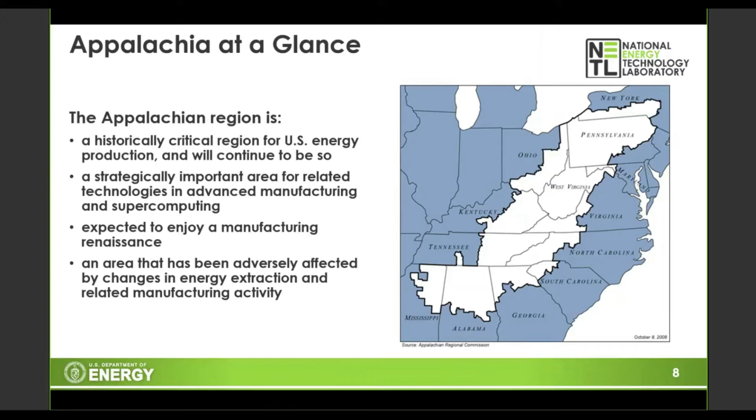Appalachia is also an area that has been adversely affected by changes in energy extraction and related manufacturing activities. So again, right here in our backyard, we've got these valuable resources that can be used for much more than just energy. And you're starting to see a lot more with various manufacturing elements being incorporated. Slide.

Some key outcomes to date since we started this initiative back in 2017 that we're pretty proud of. I'll just highlight a couple that I feel are most important. Consistent engagement with key regional partners. I talked about the metrics. The involvement NETL's had with our stakeholders has been very, very important to us, and the growth and the communication has been very productive, which has led to a lot more engagement, a lot more opportunities that were known about, and then new collaborative opportunities.

Integration of a workforce work plan. We're taking our funding opportunity announcements that we put out here at the lab, and we're looking at it from a workforce perspective. What types of opportunities could the technologies that we're creating and developing at NETL lead to for workforce development and economic development right here in Appalachia? We don't want the jobs that could come about from these technologies to leave our area. We're trying to get ahead of that.

And so I work with the technology managers here to identify technologies that are 3 to 5 years from commercialization and put together a workforce work plan that I can share with our local stakeholders, local community colleges and technical schools. That way, if they need to tweak their curriculum to have the skills ready for these jobs when they are commercialized, we take advantage of the opportunities that could be right in our backyard. And then lastly, increased growth for potential collaborative opportunities as a result of this Regional Workforce Initiative. I've talked about that a few times already, and it's very important. Slide.

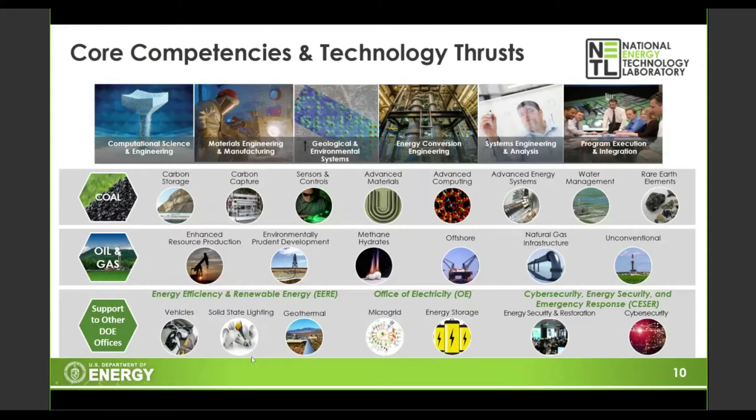There's a lot of different things that NETL does that we're very proud of. We have a very strong systems engineering and analysis group. We do modeling and simulation for other organizations. So if you have any further questions related to what types of work NETL is doing, send me an email. I'd be glad to talk about it a little bit further.

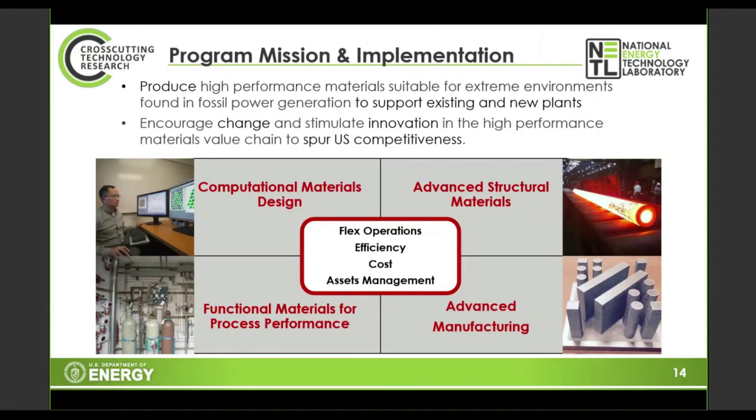But really, given this is a DOE program, it is a national program, and so we think that our work has a broad reach into the supply chain around the country. But clearly, there is a regional concentration of related work here, and a considerable benefit to the economy.

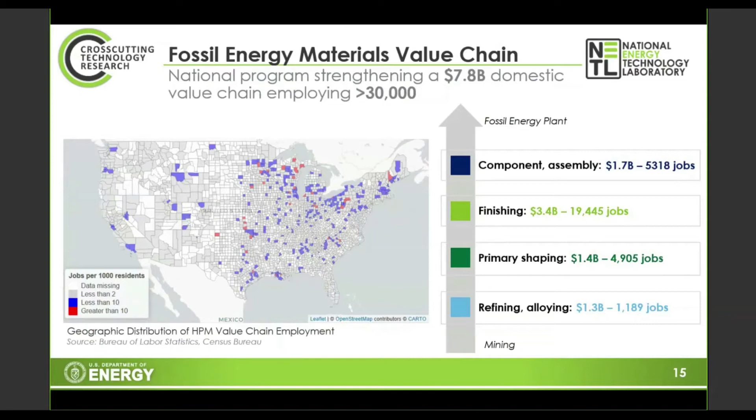These materials really enable a lot of value-added products to be generated in the economy, and they almost all require manufacturing in one way or another in order to actually create the components out of these superalloys. Workforce is really critical, and perhaps we can initiate a discussion as part of this webinar. I was really pleased to share our program overview with you because we would like to hear more about where the workforce gaps are and how we can make sure that we're developing a workforce that can come along with these advanced materials and enable them to ultimately be generated in the economy.

This is a projection, the latest projection out of DOE's EIA, Energy Information Administration. And so this is the 2020 reference case. This is a projection out to 2050 of electricity generation based on the fuel. And what you can see is after some declines in coal and nuclear here, and particularly recently, things level out around kind of the mid-2020s and stay in the mix out into the future.

Natural gas is projected to grow, but in particular, what stands out is that the renewables, the green part of the pie, grows quite a bit. And so the implications here are that fossil fuels will remain in the mix, at least domestically in 2050, and actually globally, it's even more growth than this.

And the other takeaway here that I'd like to call your attention to is that with the additional renewables creating electricity, those traditionally base-loaded assets, coal, nuclear, and gas, will have to operate in a much more flexible regime. So a lot more cycling, and perhaps the addition of energy storage and other advanced capabilities that can help the grid work in a synchronous manner.

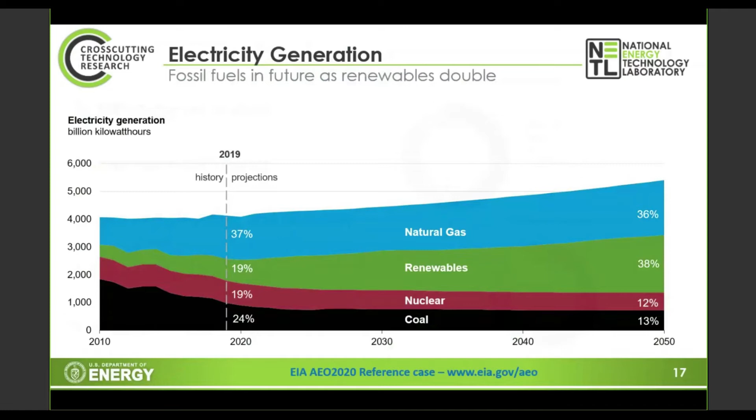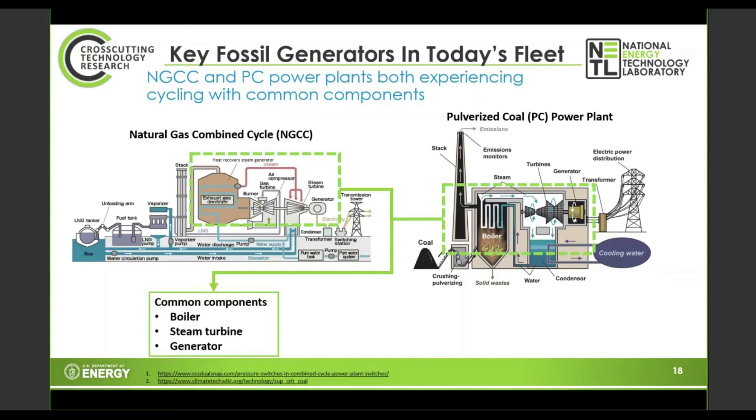If we advance to the next slide, we're going to go over some of the challenges and solutions. So the various market segments that we focus on in the materials program are the existing fleet, just reviewed that, and also new generation, next generation plants. There's a lot of different potential next generation plants, both fueled by coal or gas, or perhaps even other fuels. For example, in the case of supercritical CO2, there's interest for concentrated solar power. Nuclear is interested in a supercritical CO2 power cycle.

And these advanced cycles almost uniformly across the board require advanced materials. And in particular, the nickel superalloys wind up being enabling for the next generation plants, which tend to have much higher efficiency, and ultimately that reduces emissions and so on.

The technical challenge areas, I've highlighted a few of the ones that resonate most strongly within our program. Clearly, there are other ones such as cybersecurity, which are very important, but are not a key focus of this particular fossil energy sponsored program. Our challenge areas include operation and performance optimization, asset utilization, condition-based management, and performance improvement.

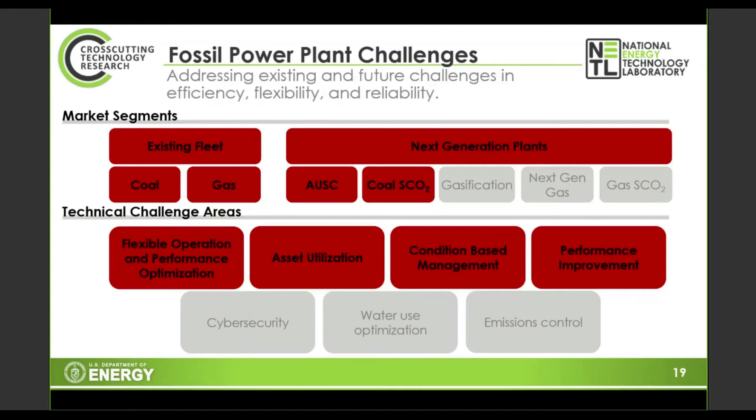These power plants made of. High temperature alloys are really the bread and butter of fossil energy power plants, and the materials that we focus on in the program. At the lower temperatures, we might be looking at a low chrome steel or a ferritic stainless steel. And then as you move up in the temperature regime, particularly above, I'd say 400 degrees Celsius, then you get into some of the advanced stainless steels.

And then ultimately, when you're getting up and around the 700 degrees Celsius range, you're getting into some of the nickel-based superalloys. So the program really looks at the range of alloys, particularly the high temperature materials, given our congressional guidance to focus there. And those tend to be enabling for these advanced cycles.

But we work on it in a number of different dimensions, whether it's trying to understand how we can bring down the cost of the alloys to improving the performance of some of the lower cost candidates so that we can ultimately bring down the cost of some of the advanced power cycles, make them more attractive for market deployment, but also understanding the materials, how to manufacture them, but also how long they will last in service conditions

so that we can understand better when components are near the end of life and perhaps need to be taken down during a controlled outage for refurbishment or repair or replacement, as opposed to a forced outage where the plant comes down and there's a loss of electricity to the grid. It's a reduction in reliability overall.

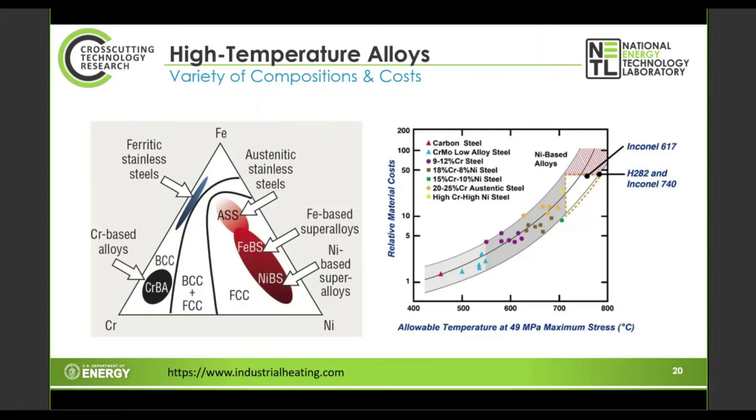Next slide, please. You can advance one more into a couple of slides reviewing the program, and then we'll do a couple of highlights and then wrap it up.

So the program, as I said, is focusing on market segments associated with the existing fleet and with the next generation. We have objectives for the existing fleet related to maintaining the cost competitiveness of existing assets. Some of the barriers, again, are aging infrastructure. Many of these plants tend to be 40 or 50 years old. They were built to be run in a baseload manner and are now being asked to operate more flexibly.

Unpredictable outages, costly repair. We do some work on trying to improve repair techniques and reduce costs associated with those. And some advanced technologies are associated with the solution set there. Under the next generation plants, here we're trying to commercialize novel plant designs with efficiencies greater than 44%. That could be through an advanced steam cycle, a supercritical CO2 power cycle, or perhaps coupling advanced power cycles with different heat sources, for example, chemical looping combustion, etc.

The barriers are making sure that the alloys have the technical capabilities to withstand both the temperature and the cycling, but also a barrier associated with the high cost, which reduces the market suitability for those alloys. And then the domestic supply chain is really critical.

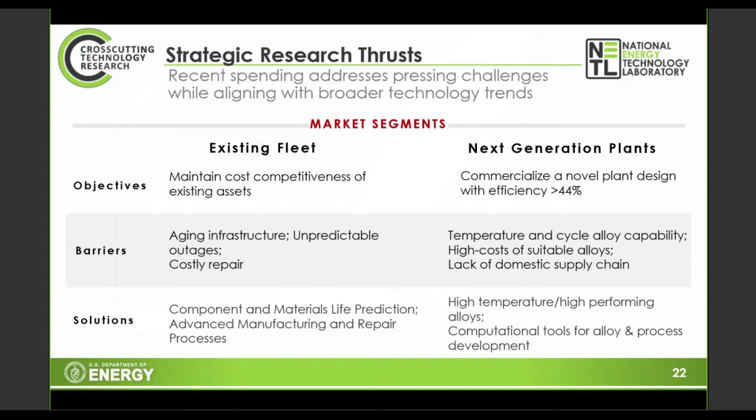So, opportunities, we have around 50 projects in the portfolio. And these projects are developing solutions that impact flexible operation and extend the life of assets. And they do that through a number of different ways. We talked a little bit on the previous slide about high temperature, high performing alloys.

We're doing that through developing additional alloys, doing full scale manufacturing trials, and also the characterization of those materials, and developing new code cases. Typically, these materials have to be certified, if you will, by governing bodies before they can be put into the application. That creates a real barrier for the supply chain to get advanced materials out into the commercial marketplace. And so we invest in developing code cases and collaborate heavily with our partners in that regard.

Computational tools, alloys and process development, lots of materials modeling. It spans everywhere from the atomistic scale all the way up to finite element analysis of full-scale manufactured components. A lot of work on data analytics in particular lately. Continuing to go around our challenge circle here.

Lots of work on advanced manufacturing, both enabling how do you advanced manufacture, in particular additively manufacture some materials where there's just not a lot of experience there, and maybe we need to develop even new additive manufacturing processes that have the throughput to be able to make components at the large scale required for power plant applications. A lot of work on repair processes.

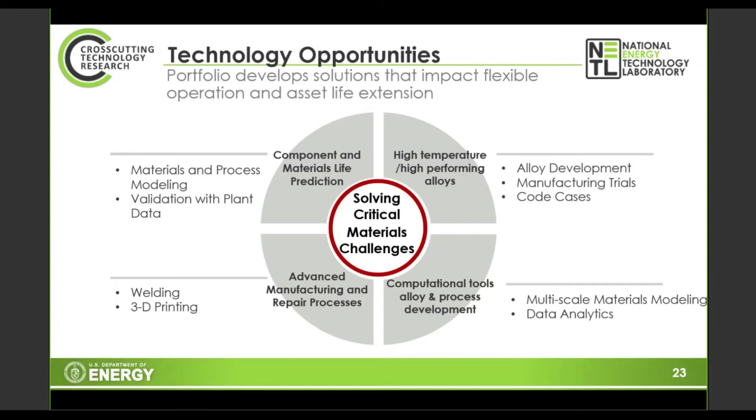And then component materials life prediction, in particular, in concert with data analytics and real data coming out of plants, we're developing models both for the materials, the components, and the processes to make sure that given a certain set of plant history conditions, we know how those materials and components are going to stand up. So that at the end of the day, we can take action to make sure the grid and the plants are operating as reliably as possible. Next slide, please.

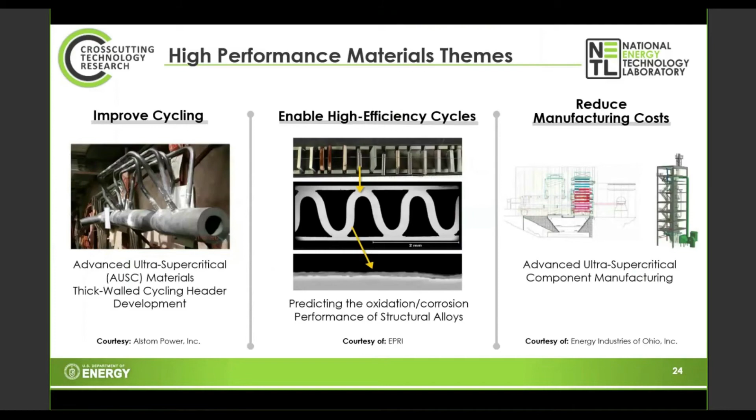All right, and so now we'll just go through a couple of portfolio highlights and then we'll wrap up. So we're developing the material supply chain for the future. So focusing on the nickel superalloys, a number of different projects there. And 2 years ago, we ran a funding opportunity announcement that started off with some phase 1 projects, each with $1 million of DOE money plus cost share. Those projects will have 18 months and will develop the feasibility of making lower cost nickel-based components that have improved cyclic durability. A number of university and industry partners in that effort. Really pleased with that. And so those projects will go through a competitive down select next year, and the phase 2 awards will be made with $5 or $10 million of DOE money.

We also have a number of other projects in the portfolio related to nickel superalloys, whether it's characterizing materials, doing modeling, doing additive manufacturing of nickel-based components. And then we have, as shown on the right-hand side of the slide, our ComTest consortium, which really does show the geographical distribution of the project team, but also reflects consistently with the supply chain graphic we saw a little bit earlier. So showing the national reach, but also the regional concentration associated with these high temperature materials. Next slide, please.

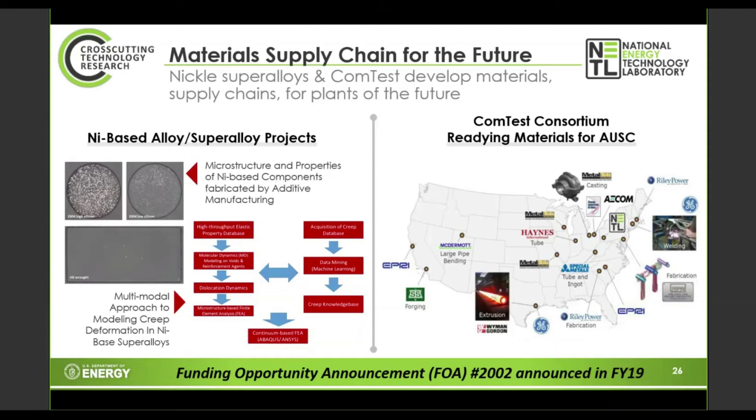We have a growing portfolio of work associated with the existing fleet. Existing fleet is really important because we have a ready market there. A large number of coal and gas plants, but also a large number of other potential market segments that can use these technologies. Here we're working on technology solutions that we think can help the existing fleet. And those include the dissimilar metal welds, whether made through additive manufacturing or more generally advanced manufacturing.

Doing advanced manufacturing in and of itself of different kinds of joints, maybe with or without the dissimilar metals, but using advanced manufacturing to do it faster with less labor and improved quality. So that helps the cycling.

Surface integrity, I've just got a couple of projects highlighted under one bullet here with Oak Ridge National Lab, NETL, and EPRI, focused on steam side exfoliation, whether through shot peening treatments or different additives to the water chemistry. Those can help with reducing scale formation and hotspot formation.

And then under the data analytics, growing volume of work in the portfolio associated with that. And here we have a project that's focused on using data in collaboration with a company called SPS. They actually have real plant data. And we're using high performance computing through a program we call the HPC4 Materials Program, where we're using high performance computing assets at Oak Ridge and NETL in combination with data analytics and that real plant data furnished by SPS to predict component lifetimes. So pretty exciting work there.

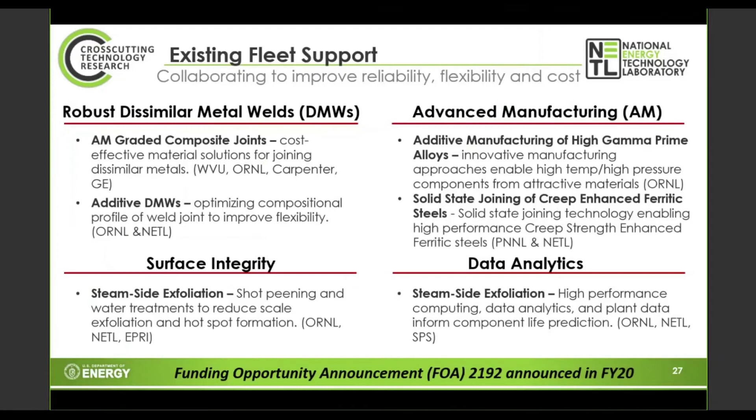So in review of the portfolio, this portfolio has a broad reach. And in addition to the existing and new fossil-based power, I just wanted to lift up that we do have some projects and some technologies in the portfolio that reach well beyond fossil power.

And so just as a couple of examples, we're doing additive manufacturing of an advanced nickel superalloy called Hastelloy X. So there we would be trying to understand the various parameters associated with manufacturing those materials with additive manufacturing, on the microstructures, the mechanical properties, ultimately enable those advanced materials to get into applications. IGT stands for industrial gas turbine. So in that case, that would be a land-based power generating turbine, but also could be used for an aviation-based application.

Down below, we have process modeling of Haynes 282. Haynes 282 is also a nickel superalloy. Here we're using process modeling as opposed to the actual manufacturing. This helps with, for example, large-scale casting. And so here we have a different kind of manufacturing process, but also with additive and some other manufacturing techniques. And that can be used, again, in power-based turbines, aerospace, et cetera.

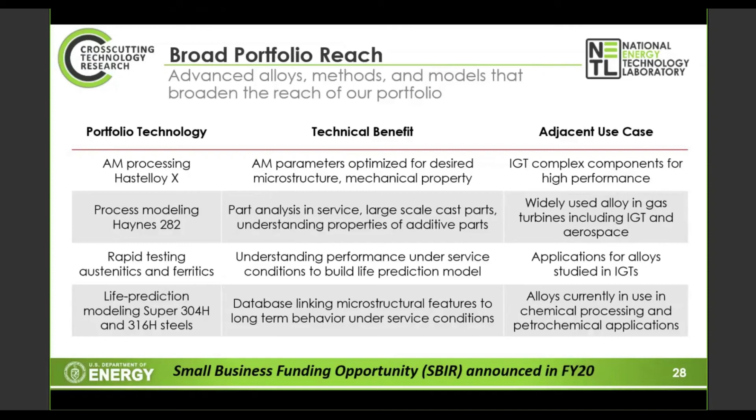And then life prediction modeling, which also has a huge range of applicability, for example, the chemical processing, petrochemical applications. And we had a small business funding opportunity in this space this year. That's currently under merit review, and that was specifically focused on the supply chain, where we would require a minimum focus on fossil-based applications, but clearly that supply chain would be able to service a broad range of industrial applications. Next slide.

So as we wrap up, I just wanted to leave you with a slide or two on engagement. So this program routinely engages with stakeholders, and through this mechanism, I look forward to hearing any feedback or continuing or initiating any new engagements that can improve the objectives of the program. This really starts with a routine engagement with stakeholders, and so we participate in a lot of forums, whether technical forums or with stakeholders. We do quite a bit of strategic analysis to quantify the impacts.

We showed some of the value chain mapping that we've done, and we're trying to better understand who is in the fossil high temperature materials value chain, but also how it overlaps with other application spaces so that we can advance objectives related to technology transfer and commercialization, and also so that we can connect with the most opportunities and the most potential partners to move some of those technologies forward. We're trying to hone the value propositions for our existing portfolio, but also identify new opportunities as we can move forward. So again, we would welcome your input.

There's a lot of different ways to partner with us, whether that's directly with the lab. I mentioned several different funding competitions, and we will continue to offer additional funding opportunities moving forward. We haven't done an RFI or a workshop in a little while. We had a workshop 2 years ago on the high temperature materials supply chain. So it's probably time for us to reconvene and do one of those again.